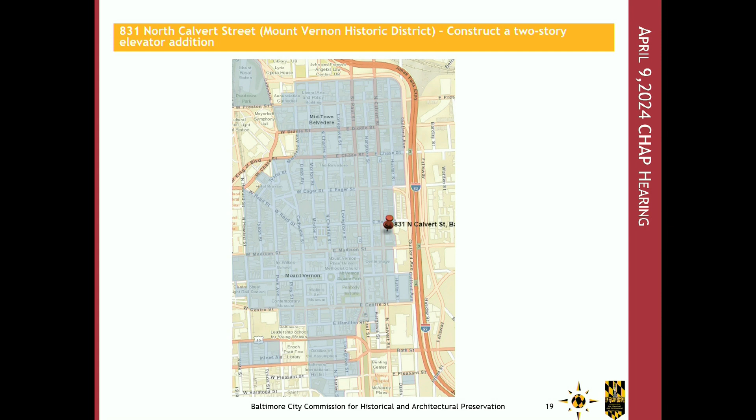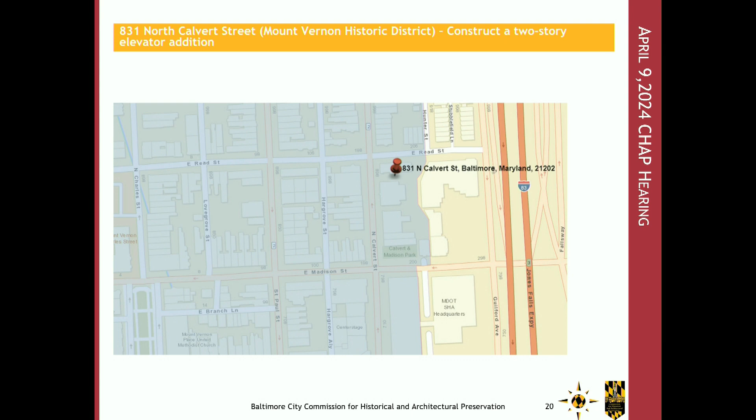Good afternoon, everyone. Like you said, this is going to be 831 North Calvert Street. We're presenting it as Anthony Stewart. Applicant is Peter Bosworth, and the owner is Be More Clubhouse. So this property is located in Mount Vernon Historic District, which encompasses 40 blocks surrounding the Mount Vernon Place. The period of significance for Mount Vernon Historic District extends from 1810 to 1945. The property is situated on the southeast corner of the intersection of Calvert and Read Street. It is a two-story firehouse which was constructed in 1908 for the Baltimore City Engine Company 16.

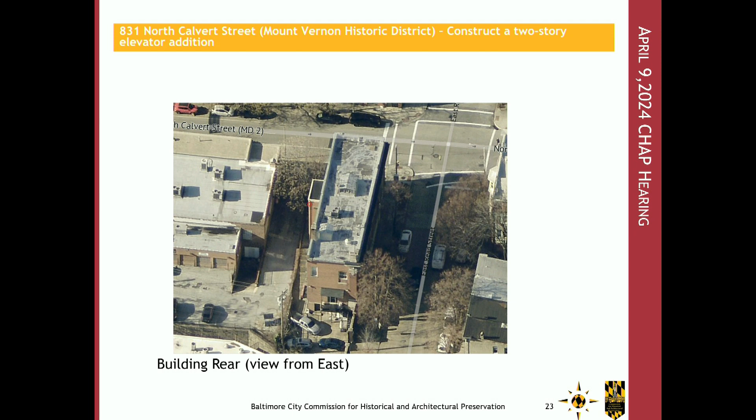Here are some aerial views from the west, south, the rear of the building, and north. The Calvert Street facade is a single bay with a large arch doorway which opens up to Calvert Street, surrounded by keystone molding which rises from the stone belt courses atop of the stone foundation. On either side of the entry are massive two-story brick pilasters rising to a stone entablature. The second story houses three double-hung one-over-one light windows resting at a single-story sill. An elaborate hooked ladder carved partially fills the space extending up from the keystone.

The south and east elevations are utilitarian with brick running bond on the south elevation. There is a two-story stairwell clad in EIFS, as you'll see in further pictures, with a curtain wall on the west elevation that faces North Calvert Street.

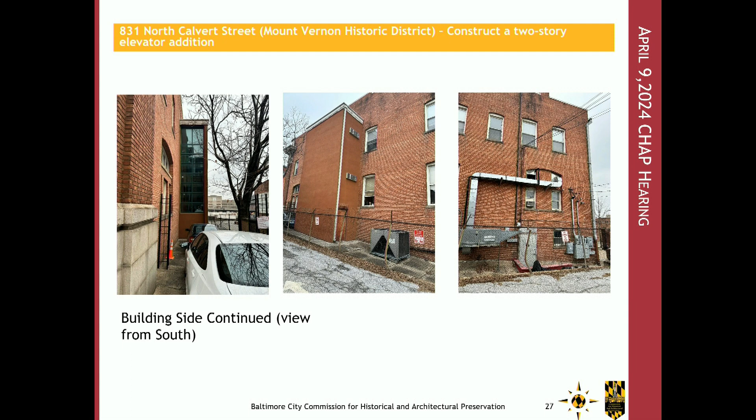The stairwell is approximately 8 feet shorter than the firehouse and is set back from the facade of the firehouse about 30 feet. A mature tree is in front of the stairwell, which decreases the visibility of the stairwell.

The Read Street facade spans 5 bays. It's also a highly ornate facade. The end bays replicate the North Calvert Street elevation, but with less detailing. The middle 3 bays of the elevation feature window openings on the first and second floor.

So, a little background: this property has undergone several reviews by CHAP staff and 2 reviews by the commission for various exterior work, including window and door replacement and mechanical work. Pertinent to this review, the commission in April 2001 gave concept approval of the exterior stairwell on the south side of the building, with colors and materials to be reviewed and approved by CHAP staff. However, there is no record of the final staff review, nor are there records in CHAP files for the permit system regarding the construction of the new stairwell or the EIFS that is currently present on the exterior.

The applicant proposes to construct an elevator shaft on the south elevation of the building. This elevator will enhance the accessibility of the existing 2-story building for occupants and visitors. The proposal is to construct the addition adjacent to the existing stairwell on the south elevation, built closer to the primary elevation of North Calvert Street.

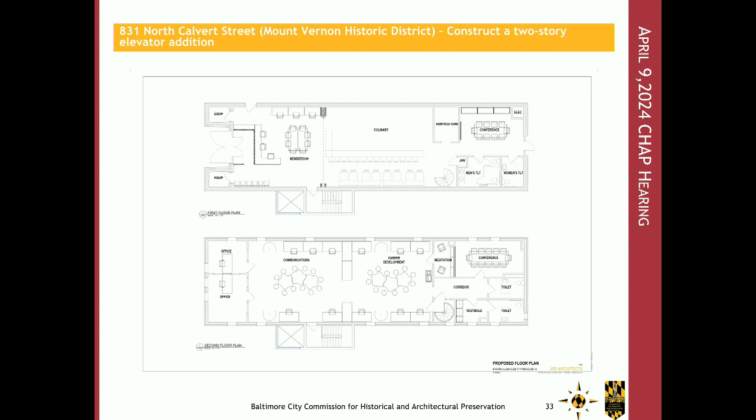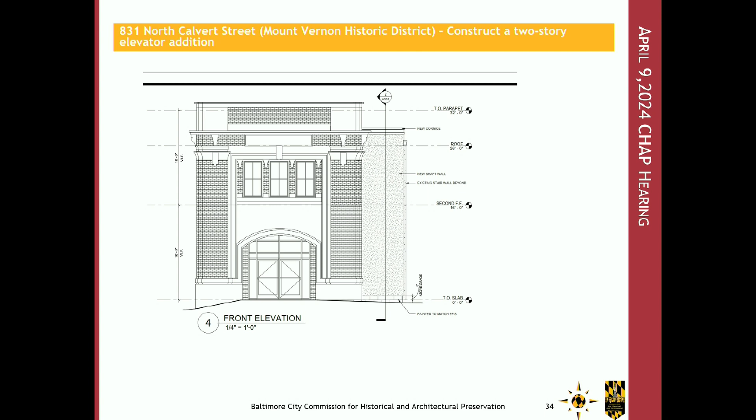The proposed elevator shaft will be concrete block clad in EIFS to match the cladding on the adjacent stairwell. There will be no windows on the new elevator shaft. It will be set back from the facade of the building by 24 feet, and it will have an EIFS cornice that replicates the existing simple wood cornice of the stairwell.

So this is the proposed location of the elevator shaft. It's going to go in front of the current stairwell, and the windows and everything that are on the current stairwell will be demolished.

Application of the guidelines: staff incorporated 1.15 accessibility. The proposal meets the goal of providing barrier-free access to the upper floors of the historic building. However, as currently proposed, the elevator addition isn't fully compatible with the historic character of the building in materials and detailing. While the guidelines recommend landscaping to screen elevators, in this case the construction of the elevator addition may necessitate the removal of a mature tree that currently serves as a visual shield for the existing stairwell. If the tree cannot be saved, the applicant will be advised to explore other landscape options.

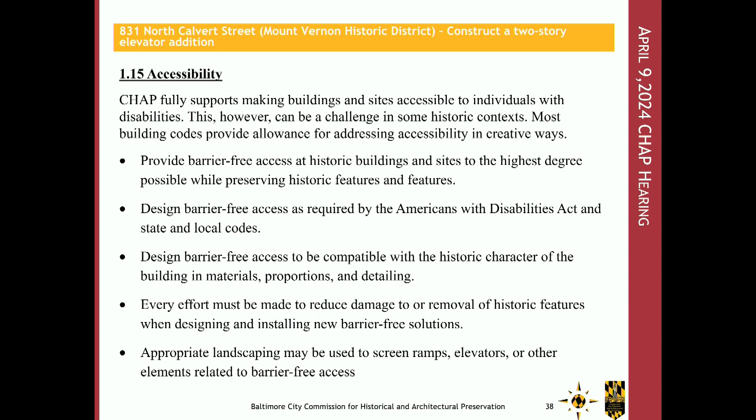1.17, alterations and additions. Excuse me one moment. Sweater, it's hot.

So the proposed elevator addition largely meets this guideline, as it has a modest footprint and will be located on a secondary elevation. This is a utilitarian elevator shaft lacking fenestration. The addition will be visible from the primary elevation as it is set back only 24 feet from the primary elevation. It is largely compatible with the historic firehouse in massing, height, form, and scale, but would better comply with the design guidelines if it matched the width of the exterior stair tower. The height of the elevator addition is not perfectly aligned with the cornice of the firehouse; this discrepancy likely won't be noticed due to the setback.

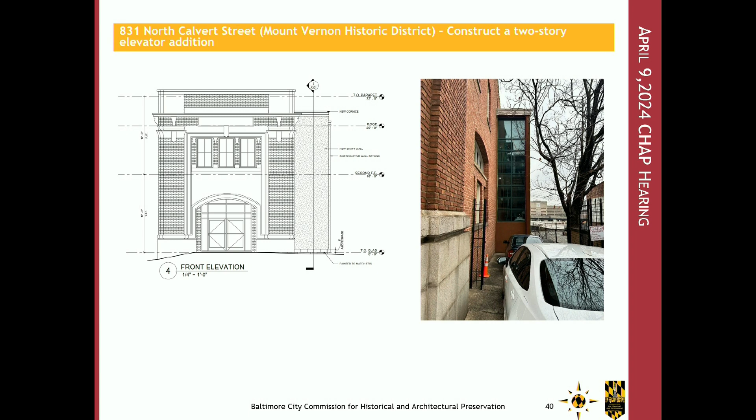Staff also applied 2.1. The proposed addition could better meet the guidelines by adding some additional detailing that visually relates to the firehouse, such as a cast stone base and a cornice that matches the height of the cornice of the firehouse. Though it can be simple in design, the goal of adding these details is to break up the massing of the two-story addition by giving it a base, middle, and top, like the firehouse.

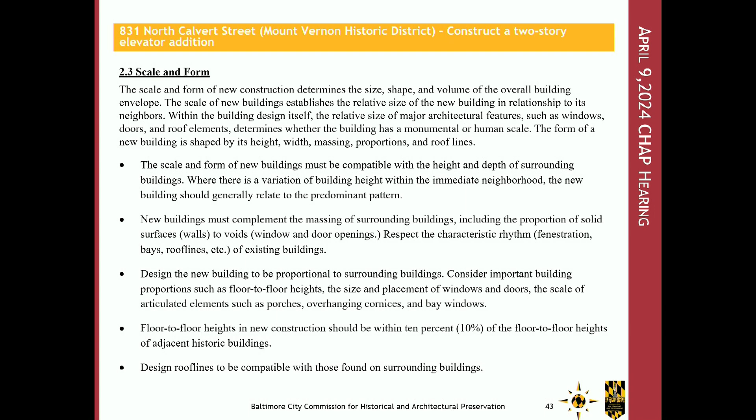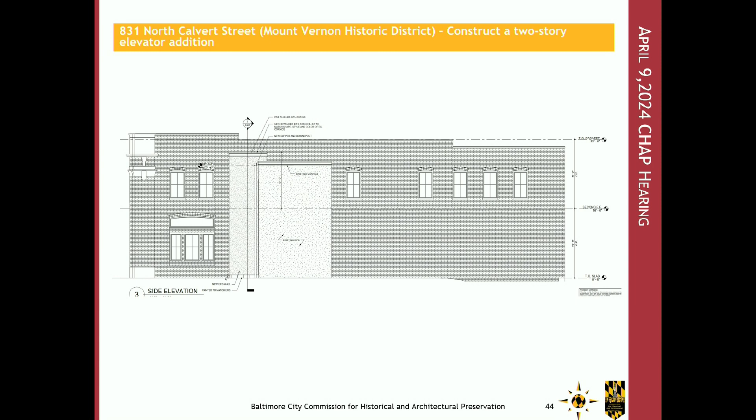2.3. The addition largely meets these guidelines as the scale and form of the new elevator shaft is subservient to the main building. It will better comply with the guidelines if it matched the width of the existing stair tower and if the cornice lengthened to be more in scale with the firehouse.

2.5 materials. The proposed EIFS cladding does not comply with design guidelines. While the existing stairwell is clad with EIFS, there is no record of CHAP approval of this material. Additionally, it was constructed 20 years ago prior to the adoption of CHAP's current design guidelines. EIFS is not a traditional material within the historic district, and the use of it on an addition that fronts a primary elevation could detract from the overall historical character of the district.

Brick is the dominant material on this firehouse and in the neighborhood at large. Given the visibility of the proposed addition on North Calvert Street, staff recommends the addition should be clad with brick.

So, neighborhood comments. The ARC and the MVBA were presented with materials and plans, and their letter was uploaded to the Wix site, which I received yesterday.

So the analysis: the location, scale, and massing of the proposed addition is largely compatible with the design guidelines, though staff believes there are some necessary updates for it to fully be compatible. First, the addition should be widened to match the width of the adjacent stairwell as proposed, and the cladding and detailing of this utilitarian addition does not comply with the guidelines. The addition is visible from North Calvert Street and thus requires more compatibility with the primary facade of the firehouse. This addition would better comply with CHAP guidelines.

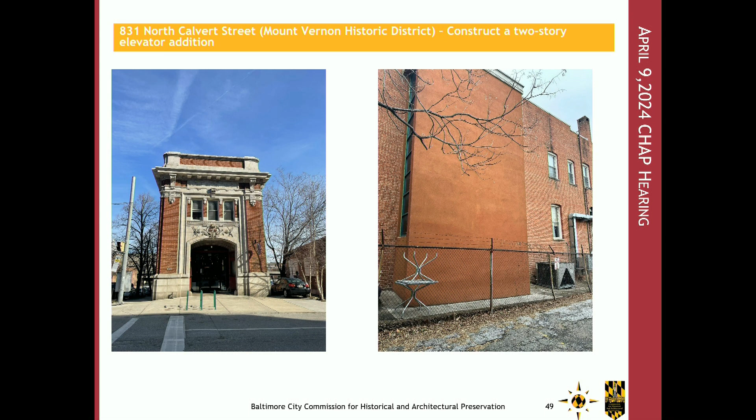It's aesthetics. Can we go to the slide that shows the street view with the trees? It's labeled building side view from street. It was probably one of the earlier ones. This one shows a little bit, but it was a view taken on Calvert, south of the building. It might have been aerial. That's fine for there.

One thing notable about the slide is you cannot see the stair tower, or much of it, correct? That's a deciduous tree, and it's not in bloom. Two months from now, you'll never see that side of the building most of the time. There are 2 other birch-type trees, you can see one in the slide, and that happens to be well screened. From the one elevation, you'll see it, moving north on Calvert as you walk or drive by. So in terms of the actual visual impact, while the trees are in bloom, it's minimal. It's not minimal as you look at it right now, but there's still some screening there.

At the end of the day, what we're proposing is just moving that stair tower wall 6 feet closer. That's really it. The idea of putting brick on it strikes me oddly, aesthetically, I'm going to argue to you anyway, it's just my own opinion. Right now you have 2 basic materials on the building: aged brick that's over 100 years old, and EIFS painted to match. So to me, you could argue it's kind of a distraction to introduce a third material.

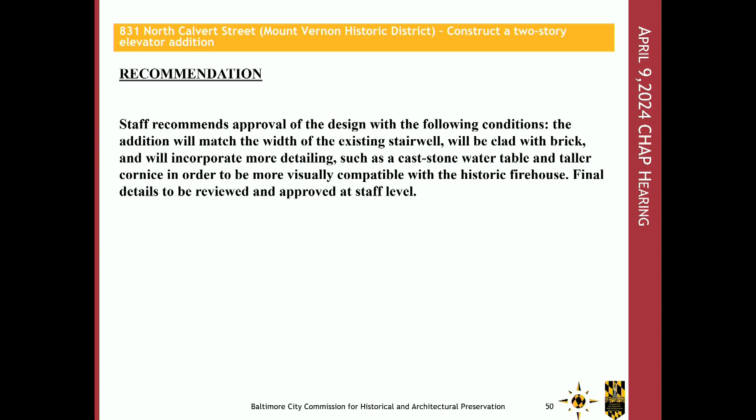Unless there are any questions for the program manager, I'm Al Barry, and I was helping Be More Clubhouse become established, initially in one location in Mount Vernon, and that didn't work out because of cost. And then we found this building, which was perfect, and it's been a great addition, we think, to the neighborhood.

When we talked to the neighborhood, I haven't seen their letter, frankly. They did email us with some ideas, and we had some conversations, but as I understand it today, staff is generally in approval, but they're recommending brick versus EIFS, and because their guidelines don't recommend EIFS, we're before you.

We would ask you to approve our material based on the conditions that are there at the site. We believe we absolutely can meet the guidelines, many of which the staff has agreed to as well, and take into consideration this is set back substantially from the street. It has existing landscaping. Your guidelines allow for additional landscaping if you would want us to do it. I think this is something we could frankly work out with your consent with the staff.

Anthony's been very helpful. I think if you can approve the EIFS, and we will add the water table, we would propose it in brick, makes sense. We can reduce the size of it or match the other one.

But I agree that if you're going to look at adding something to an existing EIFS stairway, whether it was approved by CHAP or not, it's there. And it would be more jarring to introduce a third material there. So...

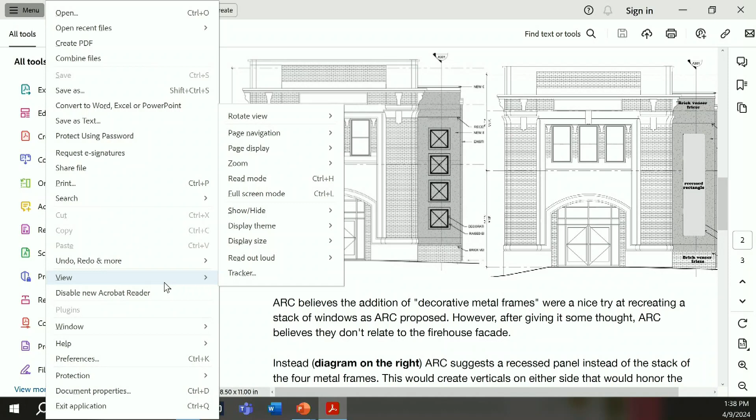He is the one that sent the letter this morning, and I just was going to paraphrase his recommendation. I don't know if we have a picture of it, but you could look at the one, the original picture earlier, if that helps. So he had initially suggested putting a stack of windows along the elevator shaft to look like the windows on the stairs, and was working with the team to come up with an acceptable visual design. They submitted a design with 4 windows, but on reflection, he believes it would be more interesting or more appropriate to have a recessed rectangle, and then the brick at the water table and the frieze at the top.

That's basically it. Are there any questions for Anna? Okay, thank you. Thanks.

So I guess now we can, if commissioners have discussion regarding the proposal, I'll go first. Thanks, so a couple things.

In general, I'm not a fan of EIFS, but in this instance, I do think that introducing a third brick, no matter the attempts to try to get it to coordinate with the existing brick, would make it unduly complicated and look weird. I just don't think you're going to be able to get a match. So in this instance, specifically because it is already in place on the stair tower, in my opinion, it's one of the rare acceptable instances where it can work.

I do not see the point of trying to do something at the bottom for the water table, honestly, because while in elevation it reads off of the front facade, in reality, when you are approaching the building, unless you're looking straight on, you're not really going to see that because the side of the building doesn't have any kind of indication of a water table.

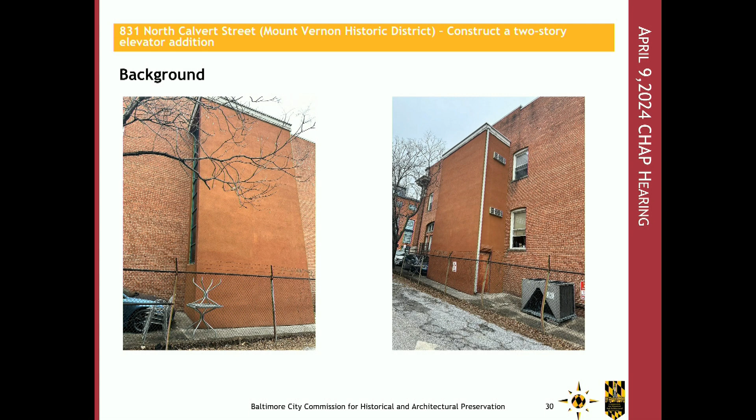So my point is, there's nothing on the side facade, and so if you just kind of stick something here, I think it would look pretty odd. So while in elevation it reads, oh, hey, that's nice, but when you're experiencing the building in 3D, you're never gonna see that. So this kind of configuration where there isn't something trying to mimic that, I think works for this instance. I don't know how others feel.

But the last point, which is the large flat facade, I do agree with doing something there. A large recessed rectangle or something like that seems to make sense to me, or breaking it up somehow. But I think that's all my comments.

Yes. Okay. Mike? Some of the similar comments, but is your mic on? I'm sorry. Yeah, it is on. Can you hear me? Can you hear me?

I think, typically, when we're looking at additions, they should be simplified as much as possible and serve as a contrast to the existing building. So the existing building, obviously, is very ornate and wants to be sort of celebrated. So I think an addition that's on the secondary elevation, not a primary elevation, should not be detailed in such a way. I think it needs to be as simple as possible, in my opinion. I think there shouldn't be anything additional that would try to give this thing a false sort of historical connotation back to the building.

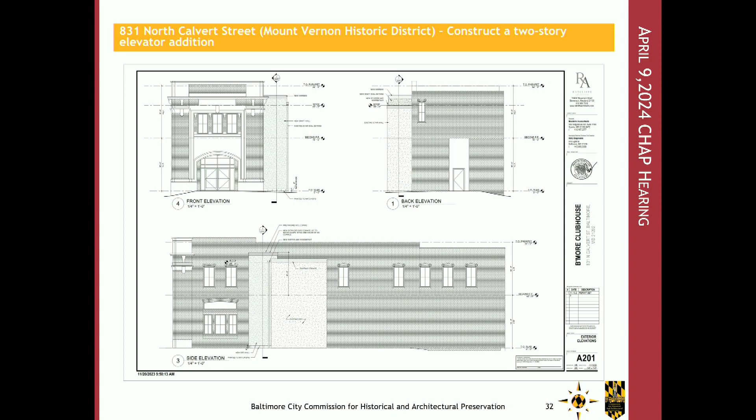Thank you. I agree with the comments Commissioner Lynn and Powell made, so you're going to have to raise the stairwell parapet to match your elevator, most likely because your elevator is going to have a particular overrun height. I think we can continue to work that out at the staff level. I just don't think that should be the tail.

I guess I was just trying to explain what make it a simple box, one box, kind of means. We know the elevator overrun is what's driving the height of the elevator box, and that's going to be higher. I didn't mean they should lower it. If they need to, they'd have to raise the stair, but is it really worth the squeeze? Yeah, exactly, that's fine.

Okay. Any other comments? I was trying to talk but having trouble pushing a button. It's very difficult. I think the elevator volume, once you bring it out to meet the same width as the stair, you won't really see the lower stair roof behind there. I would think, just from a budget concern perspective, I don't know that it's that critical.

Personally, and Sarah was saying this too, we think it's a great brick matching color, if that's the intent. I don't think we can really speak to say paint it one color or another, so I just don't want to opine on that too much.